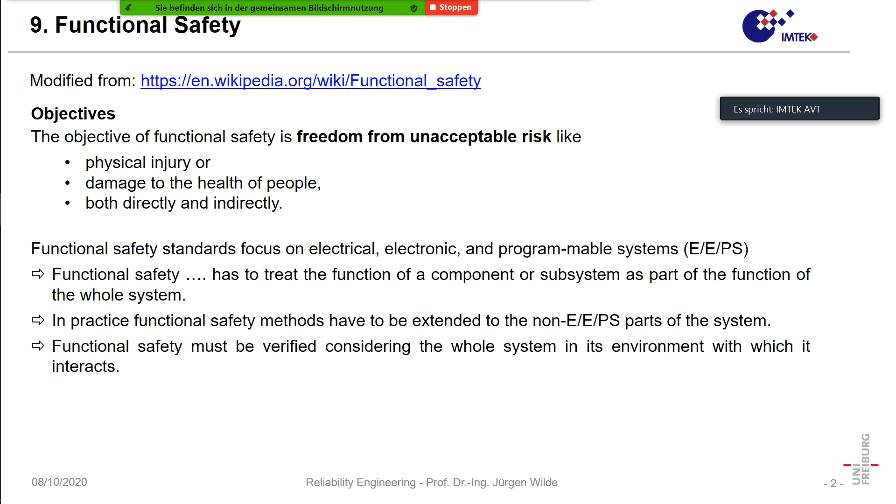Here we have an introduction to safety functions. The strange thing is that in all of the information I was using, the term safety function was never clearly defined in the beginning, but it was more described in an implicit way.

So I would say a safety function is something which becomes active when a system is having a fault or a failure. In that situation, a safety function must become active, and it must, for instance, bring the system into a safe state. That means failures can happen, but when the failure or fault has happened, a safety function must become active.

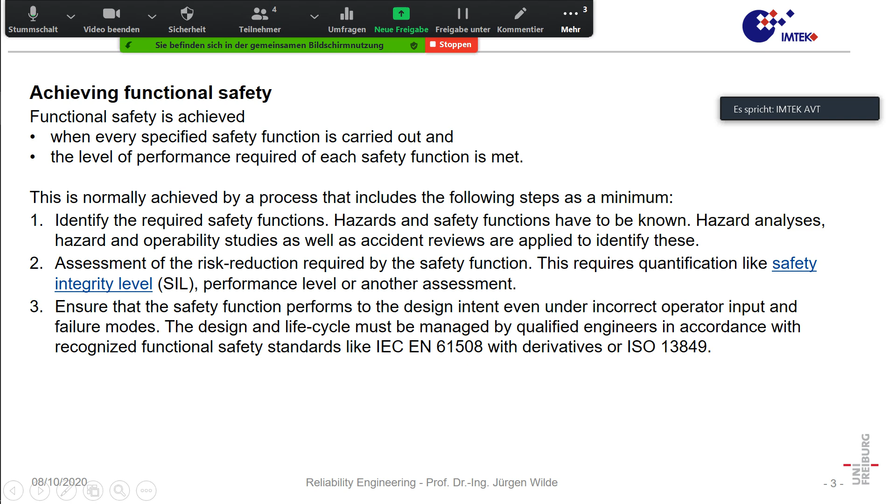So the background is not so much which technology you use, but the background is more the application area. IEC is more for generating and using such electronic systems. ISO is, for instance, also dealing with automotive technology, which is more mechanical engineering technology. Nevertheless, both use very similar standards and similar technologies here.

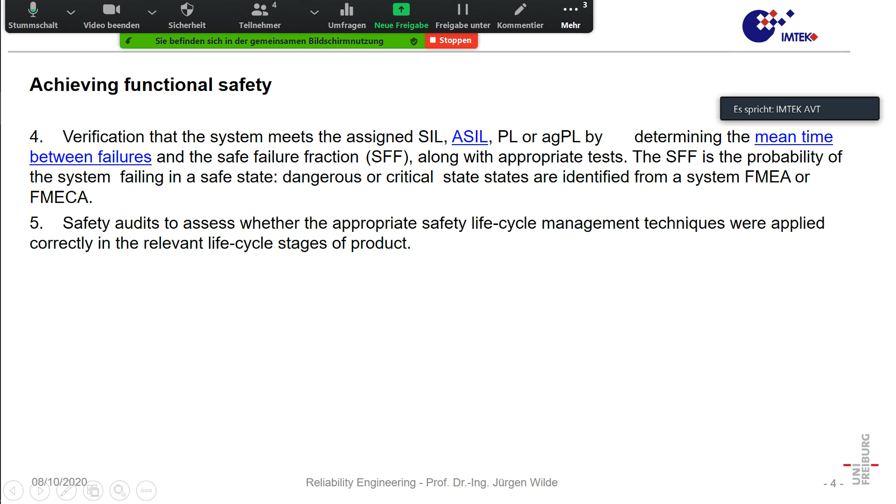When we do such functional safety activities, we must verify that the system meets the assigned safety integrity level, or ASIL, which is automotive safety integrity level, and in that way several properties are important. One is the mean time between failures, because these in most cases are repairable systems, and we have a safe failure fraction, which I will explain in more detail.

So these are properties, and of course for these we need to perform risk analysis, and implementing safety functions is already a technique of risk management then.

The safe failure fraction is the probability of the system failing in a safe state. So we have probabilities of failure, and the system can fail in different ways. It can fail and become a dangerous situation. It can come into a dangerous situation which we detect. It can come into a dangerous situation which we do not detect. It can fail and come into non-dangerous situations, so there are quite a number of probabilities.

But when we detect such a situation which is dangerous and which we can bring into a safe state, then the probability that this will happen is the safe failure fraction. So it is important to note the mean time between failures, or the failure rate, describes the probability something evil will happen. We know this. The safe failure fraction is a measure of when such a thing has happened, how probable is it that we can deal with it in a way the situation becomes safe.

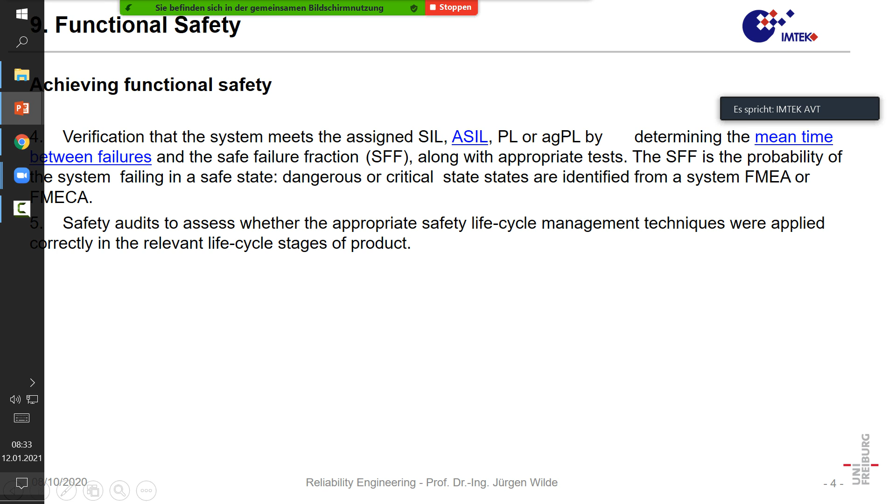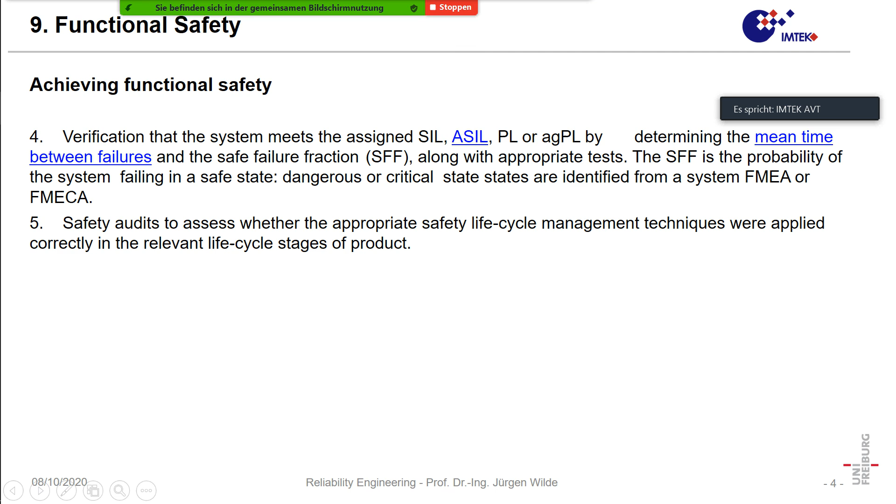So that means probability of failure and probability to deal with a failure are important properties which we need.

Now let's deal a little with this standard, 61508, the standard on functional safety of electronic programmable systems or related systems. It is an international standard published by the International Electrotechnical Commission. When you have the PDF of these lecture notes, you can directly go to an appropriate link.

And that standard is intended to be a basic functional safety standard applicable to all kinds of industry. In fact, many standards specific to certain industries have been derived from this.

There are certain standards for, let's say, medical devices. There are certain standards made for the aircraft industry, or let's say when we have ESA or NASA, they have standards derived specifically.

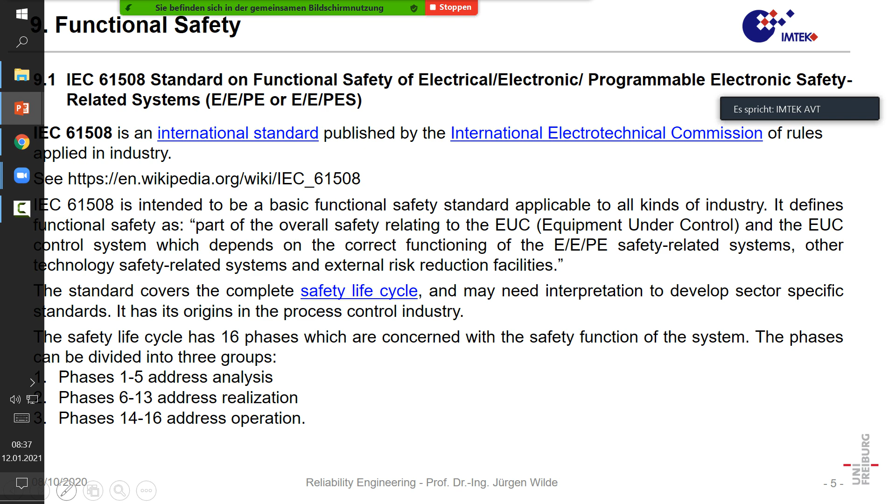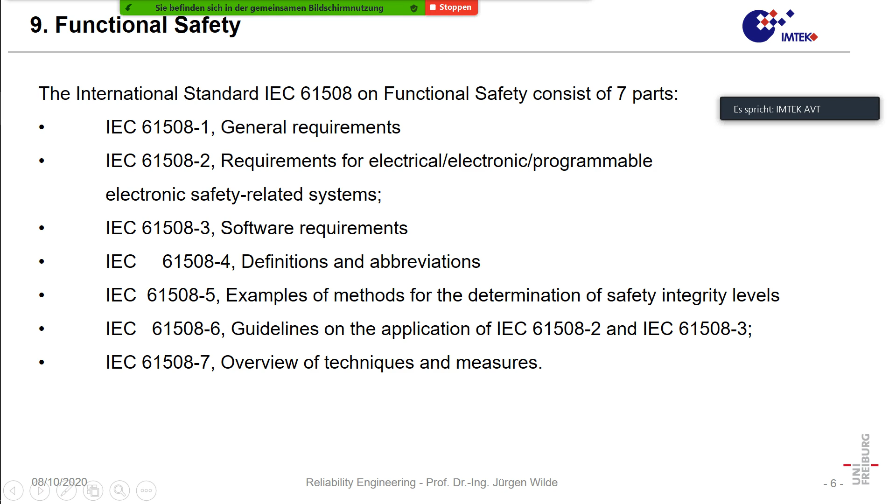I think making such standards must not only be accompanied by big companies, but also by independent experts who have an eye on the general requirements of society.

There are some views in that standard: zero risk can never be reached. That's quite straightforward, because zero risk can only be achieved when you avoid something completely. So you have zero risk from automotive traffic only if you have no cars. But that's not the way we want to go, because we want to implement technical systems.

Safety must be considered from the beginning, from the first idea of such a system, not built afterward by screwing some safety devices onto it. It must be an integral part of the complete design and specification. Non-tolerable risks must be reduced.

The first thing I already mentioned is we have to perform a hazard and risk analysis. That means we must define the probability of all events that can happen, and second, what the consequences of these events are.

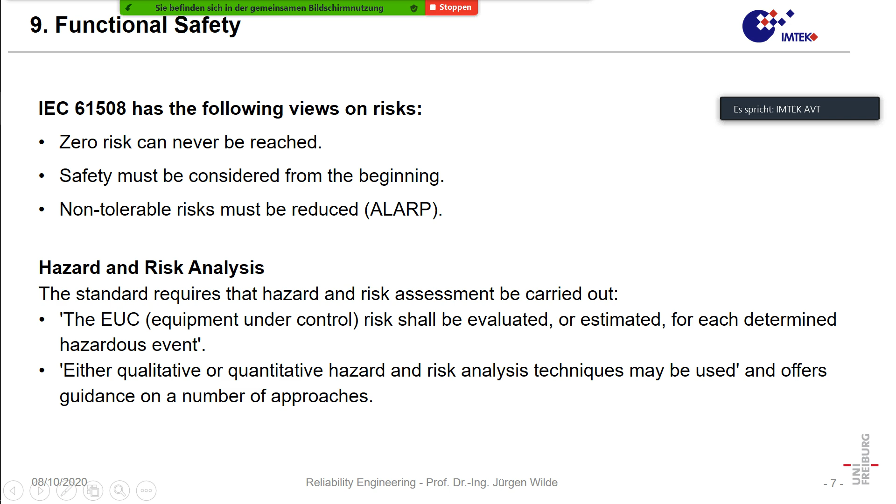Now let's first have a look at the probability that some failure occurs. We have categories: frequent, probable, occasional, remote, improbable, and incredible.

When we have a system which operates continuously: if it happens many times in a system lifetime, it is frequent. If it's only several times, it is probable. For instance, we have a failure per year—if it's above 1 promille...

then it is frequent. 1 promille per year means for one individual system, over a typical lifetime of 10 years, that's 1%. But imagine we have 50 systems in operation—we'd have almost a 50% chance that something will fail that way.

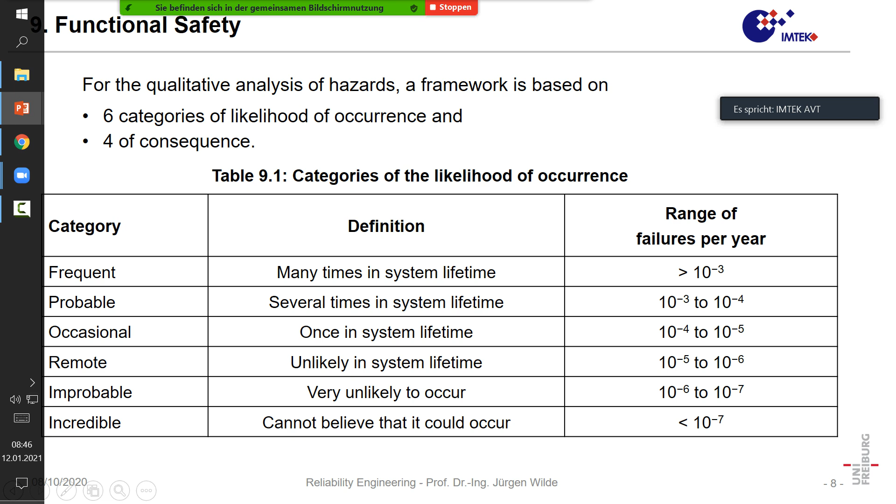So these are the likelihood categories. Then we have the consequence categories: catastrophic means many people are killed, or at least several; critical is if one person is killed; marginal means major injuries to one or more persons; and negligible is minor injuries at worst.

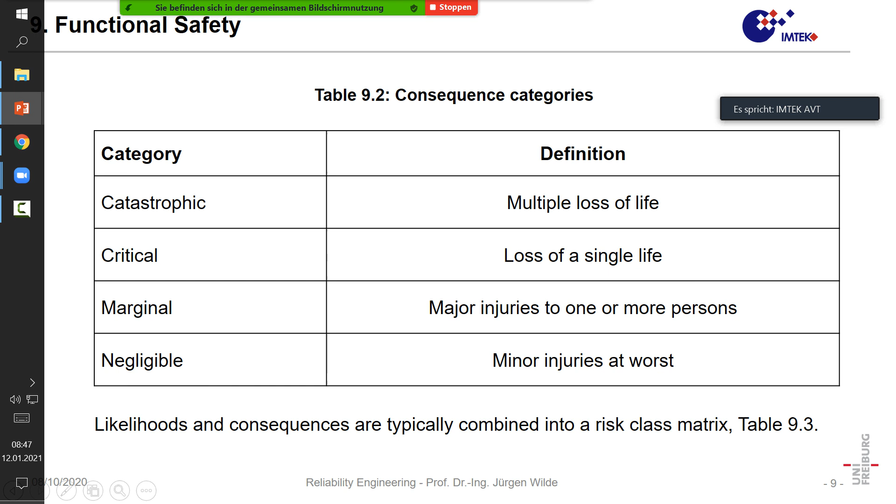What's important in these definitions is we do not consider loss of property, only how people are affected as persons. These 6 categories of likelihood and 4 categories of consequence are combined into a risk class matrix. Here we have 4 classes.

When we build up this matrix, of course the worst case is catastrophic and frequent. If every year a nuclear power station would blow up, that would be the least desired situation—it's unacceptable under any circumstance.

But again, frequent appearance of hazards is also always unacceptable, even if it's only a marginal effect on persons. The combination of frequent and severe consequence must be low, and the more to the upper left it is, the higher the induced risk.

If it's negligible and also incredible, that's the best—it's acceptable as it stands. But there are also situations where we could say we must do a little more.

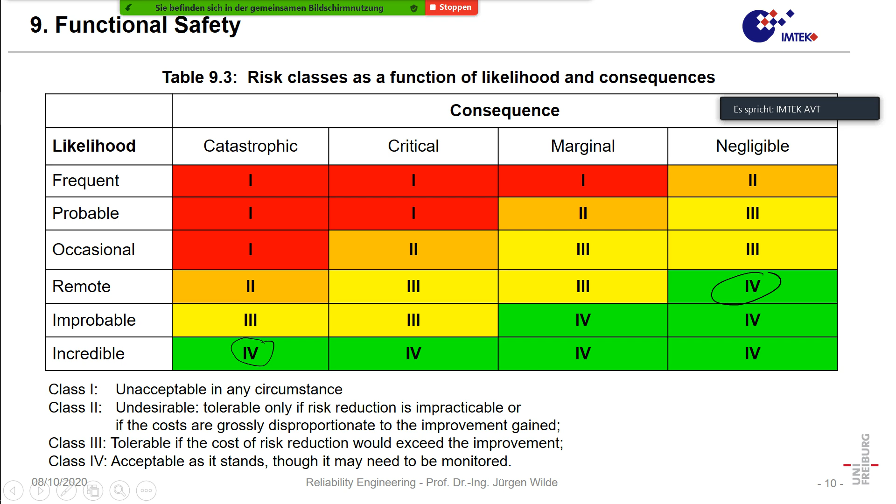That is safety integrity level, and so we have 1, 2, 3, 4 such risk classes. In the classification of automotive there is some more aspect, which is the question of controllability.

So if such a hazard occurs, the question is still, can a driver deal with that situation? For instance, as I mentioned, we have the anti-lock braking system. If you are in normal operation and that system fails, the driver can deal with it. He can drive slower, he can shut down the motor and go walking, or something like that. On the other hand, if his steer-by-wire system fails, probably the situation is hardly controllable.

And in that way, they can define controllability: generally controllable, simply controllable, normally controllable—that is most drivers—or difficult to control, or uncontrollable.

Here we must also say that when it comes to controllability, there is a very strong effect of training. Training is normally not done in driving. You get your license and then you get more and more experience, maybe by coming into certain situations just by chance, you can deal with that situation. Or for instance you drive on a slippery road but under controlled conditions, so you can train a little how to drive on an icy road, and then in a critical situation you can deal with it better. So that would be some self-training.

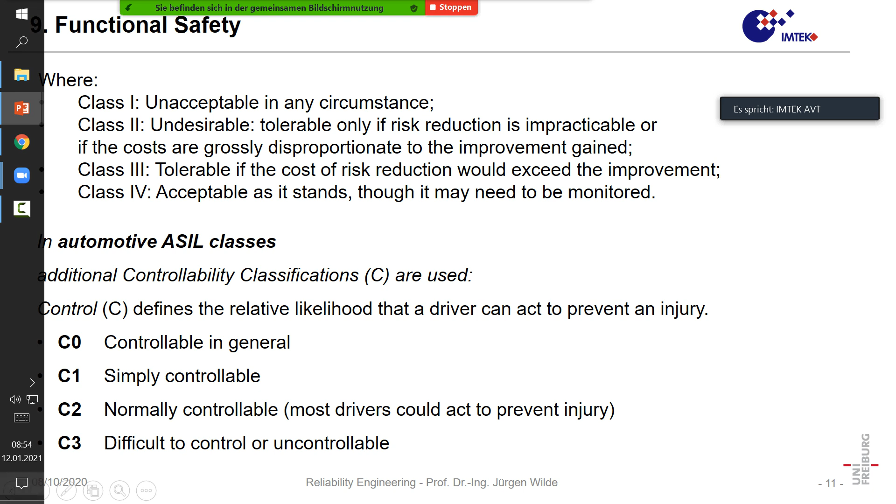In automotive, when people set up such a thing, normally the engineers must start from the assumption that the normal driver is dumb and untrained. So now, when we have these classes, the question is how critical it is. We have the SIL classes, and for these classes we must specify which probabilities of dangerous failures we allow.

There are mainly two aspects of how we can treat such a system. One is the low demand mode—that means we only have a system which is operated from time to time, sometimes it is turned on or such a thing. The question is, when it is used, will there be a probability of failure or not? So that's an absolute probability, the question of how probable it is that it will fail when you use it a single time.

That can be between 1% and 10%. That would be SIL class 1, so that is quite probable. We have SIL class 2, that would mean between 1% and 1 promille. And SIL class 3 would mean 1 promille to 100 ppm, parts per million, or 0.1 promille.

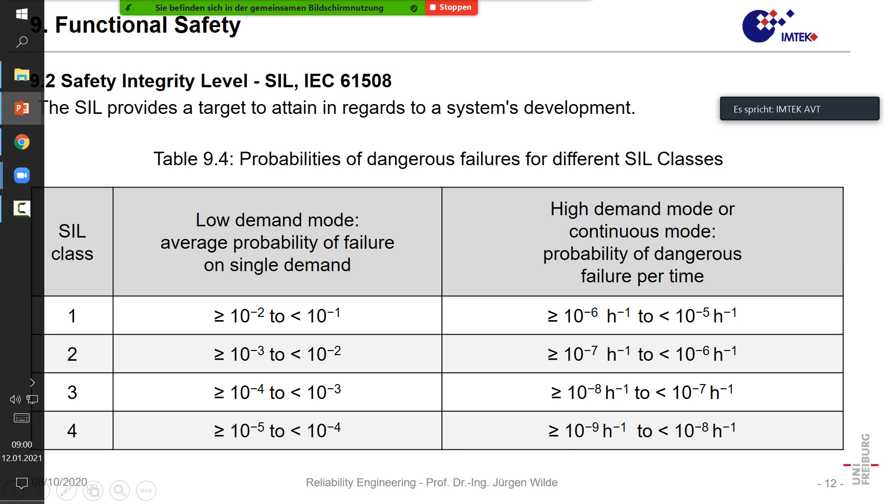But now let's go specifically back to safety functions. So we have defined safety integrity levels. On the other hand, we have seen failures can happen, and if the failure can happen, the consequence has to be expected. But functional safety in automotive is generally to prevent dangerous failures in automotive control units. On the other hand, nothing can be failure-free, but the consequences can be avoided.

And there are three main targets when we have automotive control or automotive functions. The one thing is avoid systematic faults and failures during design, development, and manufacturing. So we can make systematic faults during design, development, and manufacturing. That could be some kind of misdesign, or some behavior has not been implemented, or maybe you have just not a good thermal design, so it will overheat, and such a thing. We must avoid such systematic faults during design, development, and manufacturing.

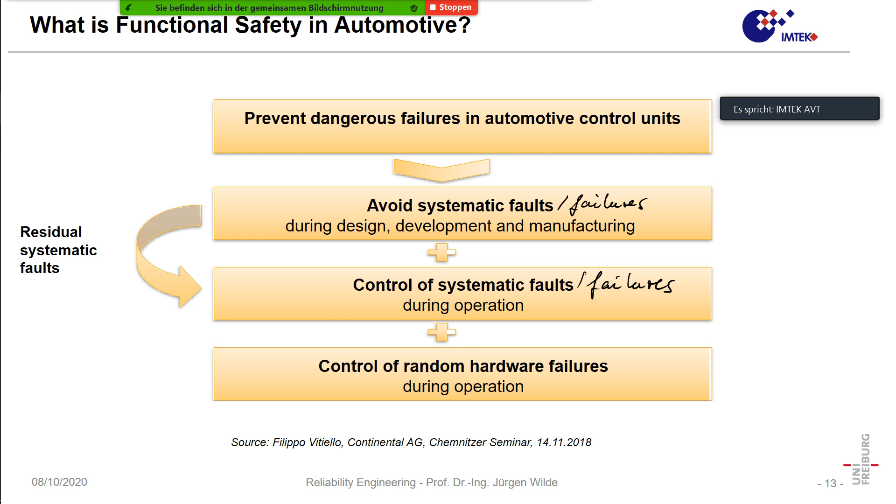Then we can also have systematic faults during operation. Such faults or failures can again be something from external effects, something which comes from the environment, or something which has to do with electromagnetic compatibility or such thing. Such faults could happen during operation. And we can also have random hardware failures during operation, just failing by chance. We have the normal exponential distribution. Some devices fail from time to time. And it is important, especially, to see for systematic faults here.

Now give us an example. That's a car. The car has some steering wheel. The car has also a traction unit, and there are quite a number of elements which can already fail, and again we can have many possibilities of failure. Imagine something like what would be a dangerous situation. Of course, extremely dangerous is when we cannot steer anymore during the driving. What can be somehow dangerous, but possibly not as dangerous as with steering, is when traction is lost. Maybe we are on the left lane on the Autobahn, and suddenly the motor goes out or a wheel is blocked. Then I would say that's already dangerous, but maybe not yet as dangerous as when you cannot steer anymore. But so such a thing could happen.

For instance, we could have a hardware failure, and of course the system will be in a safe state when there is no failure. But imagine something fails. Then we can have two possibilities. Either it fails in a safe way - for instance, a component fails in our control unit, but a second control unit will take over and help us keeping the car steerable. Then it would be a fail-safe situation. Or it could be that this safety function which is implemented doesn't work. Then the whole system would fail dangerous, or what can also be, there is no safety function, no redundancy, no control switch which brings our car into a safe state. And of course, both are dangerous situations.

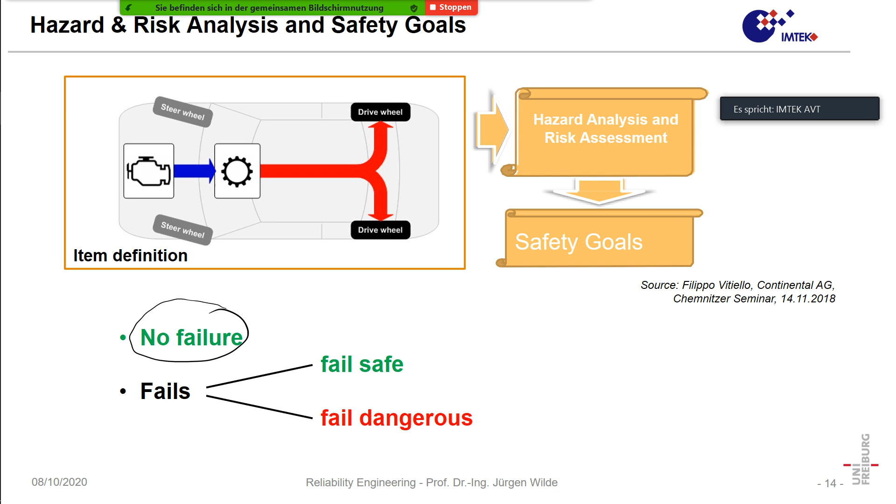And now imagine we would drive, and normally when we have our operation, we have a certain time until the fault is detected. Let's say, what would be a typical fault detection time, depending on what the typical control cycles in such a system are. I would say it is probably something in the 1 second range. So generally, it has to be detected if there is a fault.

And after that, there is a fault reaction time. Just to give you an example, it could be the time until the second redundant system comes into action. So especially if it's a warm redundancy, it will take a time which is at least longer than the fault detection time. If it's a cold redundant system, then normally it would not be suited to keep up safety.

Okay, and then the system will stay in the safe state. On the other hand, that's a situation when the safety function has worked properly, but what has to be avoided is violation of the safety goal. That means the fault is not detected, or there is no proper reaction to that fault.

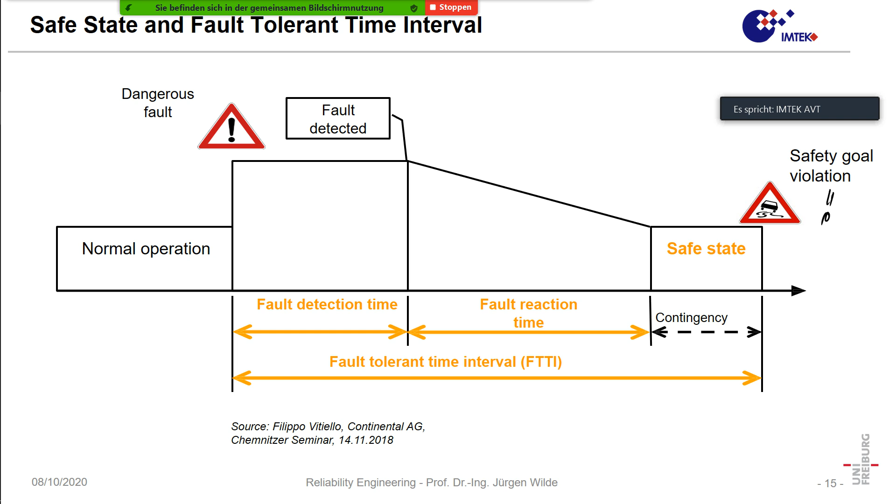Okay, and in that way we can say now we have a completely new concept. We not only have a risk which can appear, but we have dangerous states, and we have to avoid, after a failure, dangerous states with high probability and within a certain time, which is the fault-tolerant time interval. And in that way we have already important safety goals, and these safety goals must be accomplished by our design actions.

Again, to show it to you, normally we have a single point fault. So let's say something is breaking. Something will happen because our system does not have a safety mechanism. We have a safety goal impact, which could be a real impact of the car somewhere, or impact on a pedestrian or something like that. On the other hand, what a modern system must accomplish, we have a single point fault, so there's already a certain risk.

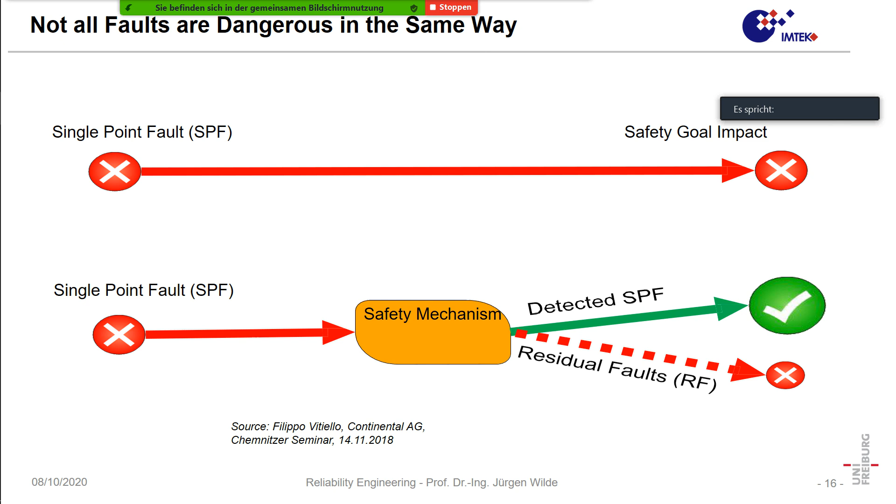We have a safety mechanism. We have detected that single point fault and we deal with it. So detection doesn't just mean we know it's there, but also that we treat it. Or we have residual faults, and these residual faults are either faults which are not detected or which cannot be dealt with.

Now we have the so-called safe failure fraction. So after we have a defect or a failure, the safe failure fraction gives us the probability that the system can still come into the safe state. And it compares the likelihood of dangerous failures with that of safe failures plus dangerous failures, so with the probability of all failures. So that's here, of course, 1 minus safe failure fraction.

Reliability by itself is not sufficient to claim a SIL level. So for a SIL level, you cannot just say the probability it happens per event or per time gives me the SIL level, but we also must guarantee a certain safe failure fraction.

When we have a no-redundancy system, and we have a safe failure fraction of 60 to 90%, that means with 60 to 90% we can bring the system into the safe state, that can only give us SIL level 1. If the safe failure fraction is below 60%, it can be made safe or not, roughly 50% let's say, such a system is not allowed. If it's 90 to 99%, we can have SIL level 2.

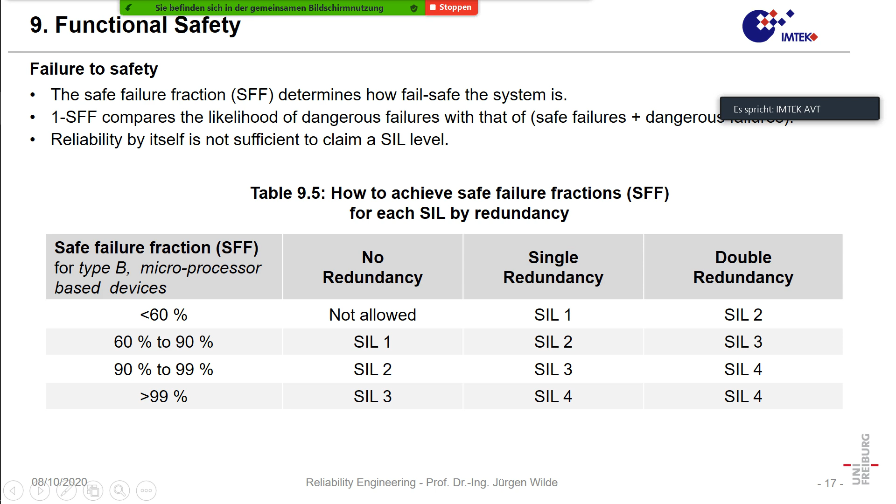So in the standard, we say we have probabilities of the individual failure categories, and we have as a second, safe failure fractions. In that way, from our SIL level which we want to achieve, we have to derive safe failure fractions, and we have to derive probabilities or rates that are accepted as maximum.

Okay, such a management summary is given by Mr. Vitiello. He is the chief engineer in the Continental company, one of the biggest automotive suppliers. So we have ASIL goals, and in order to make our system, we have first to perform hazard and risk analysis.

Then we must build up a functional safety concept on the vehicle level. That is typically done in cooperation with the car manufacturer, or OEM as we call them. And then the hardware-software safety mechanism is implemented, and that's on the control unit level.

So last time we have seen how to develop control units, and when we have such a subsystem, again we must go into the analysis. Here we are on the vehicle level, here we are on the control unit level, or on the subsystem level. We make an FMEA or other similar analysis.

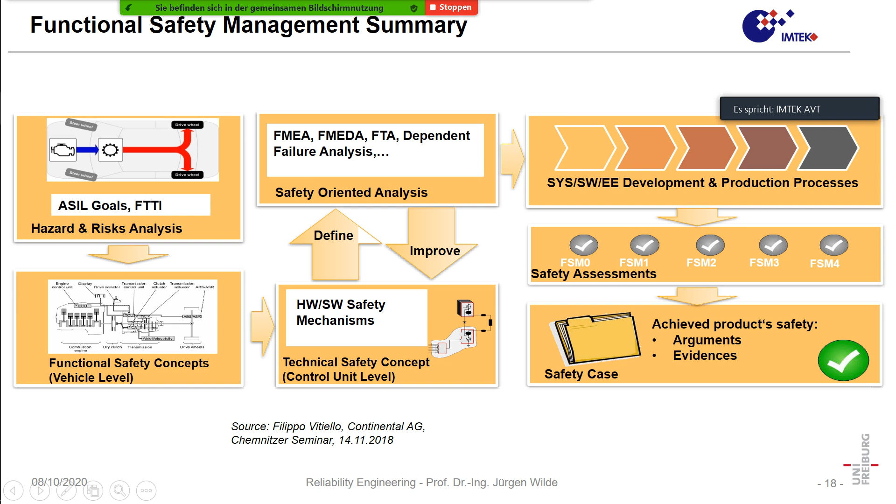So, for instance, you have a control loop you implement. It is the smallest part of the software. Most of the software then is for something like watching and keeping it safe, and maybe having a backup when something goes wrong, when we have a fault. So that means it is an important measure, but on the other hand, it makes software also much bigger.

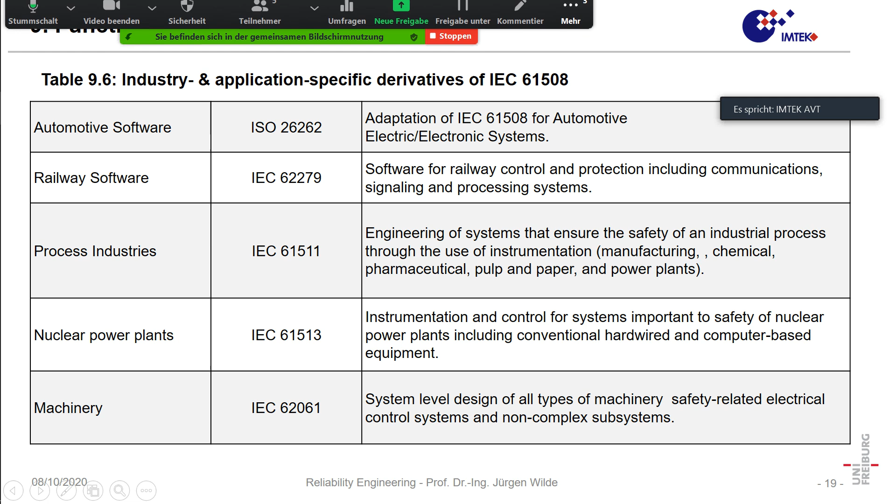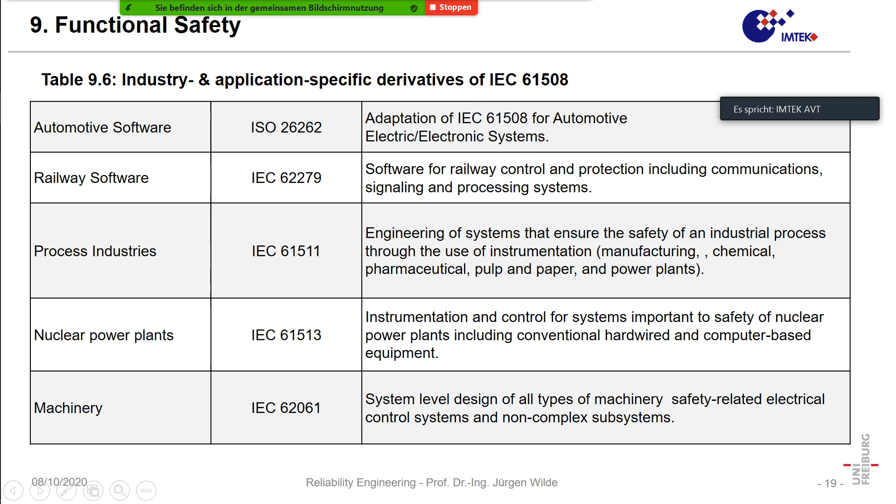Okay, that means that's a modern concept for how to make systems safe. So that goes beyond the initial idea that risk is the product of failure probability and severity, and if it's lower than some boundary value, we are on the safe side. But on the other hand, in modern systems, we go far beyond this.

We have the so-called SIL levels, and these SIL levels, of course, deal with the situation that very severe events can happen, but then the probability must be small. And on the other hand, it also requires that we have safety functions, and these safety functions must work with a high probability and within a short reaction time. Okay, now, maybe for the last part of today, there are some aspects of safety which are human factors.

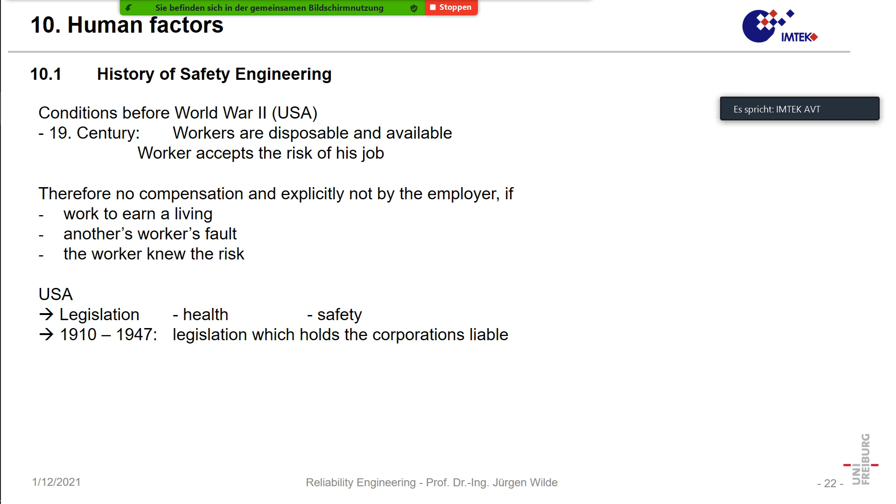For instance, in the 1930s and 40s, beryllium was introduced as a special metal, first in metallurgy and second in special applications. Beryllium is a very strong material which is extremely light, but unfortunately it's also the most poisonous material. When you heat it, for instance for welding, it evaporates and these vapors are deadly. So workers were just dying, or getting some very severe lung disease. That was the situation until shortly before 1950.

On the other hand, in Germany, Mr. Heinrich was the first to systematically investigate industrial accidents. He found that when you look at accidents, you have the following relation.

Imagine you have something like 360 accidents. From these, typically in industry, one was severe 100 years ago, 29 or 30 were minor injuries, and over 300 were accidents that didn't result in injuries. That's the so-called Heinrich's pyramid. It says that most accidents are injury-free, but on the other hand, you have a probability of about 3 per mille that something severe will happen.

That means when you have 10 million employees, 3 times 10 to the power of minus 3 times 10 to the power of 7 gives you at least 30,000 severe injuries. This so-called Heinrich's pyramid was the first time accidents were regarded systematically.

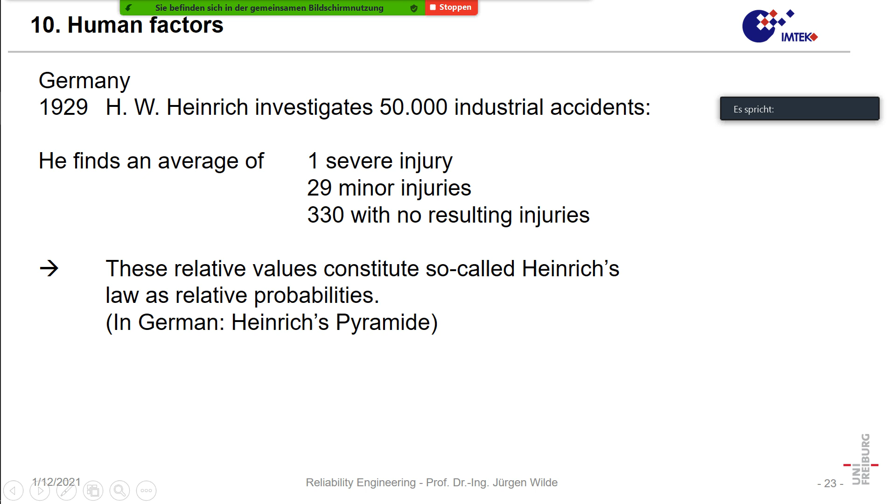So the situation mainly improved because of better legislation. In Germany, that legislation included creating the Berufsgenossenschaften. On the other hand, just giving power to the people who have to pay for it helped improve the situation.

So now let's have a look at accidents—not only labor accidents, but accidents generally.

One thing is you could have technical reasons. You have systematic faults in the design, systematic faults in the operation, random failures of hardware, and if these come together, and if the people involved are not able to control the situation, then we have an accident. That's more the chain of action, as we try to deal with it through safety functions and risk analysis.

On the other hand, you could have another view which is more about the whole system - it's hard to say what the safety culture is. Independent of these other aspects, you could say you have a safety culture where everybody on every level is aiming at safety. It's similar with quality. Safety must be a goal set by the highest management, and if it's enforced in the company, then the lower levels also have a safety culture. On the other hand, if management doesn't have a safety and quality culture, the whole company will not be able to develop it.